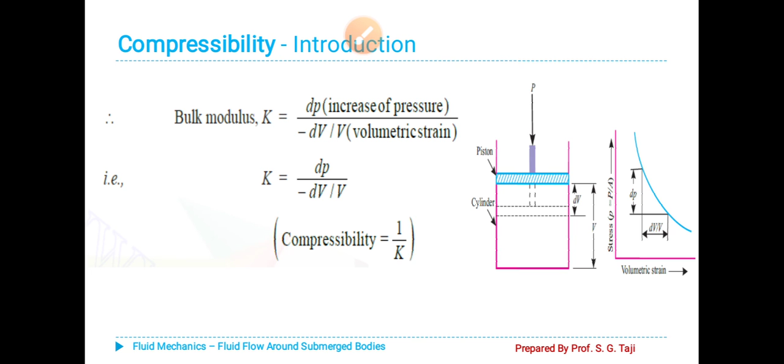Now we will see in detail about water hammer in pipes or hammer blow in pipes. As I had already pointed out in the last class, whenever you enter into the bathroom or kitchen, when you stop the valve suddenly, you might have heard some noise in the form of dug dug noise. That is because of the phenomenon of water hammer. Actually, here water is assumed as compressible, because of which the elastic forces of fluid, that is water, which is flowing through pipe, should also be taken into account. This phenomenon is known as water hammer.

Water hammer can be defined as: whenever the water is flowing through the pipeline, if the valve is suddenly closed, the kinetic energy or momentum will be changed into pressure energy. Because of this development of pressure in the pipeline due to sudden closure of the valve, positive and negative pressure waves are produced, and they will move to and fro in the pipeline, that means backward and forward, till they get damped due to friction of walls of the pipe.

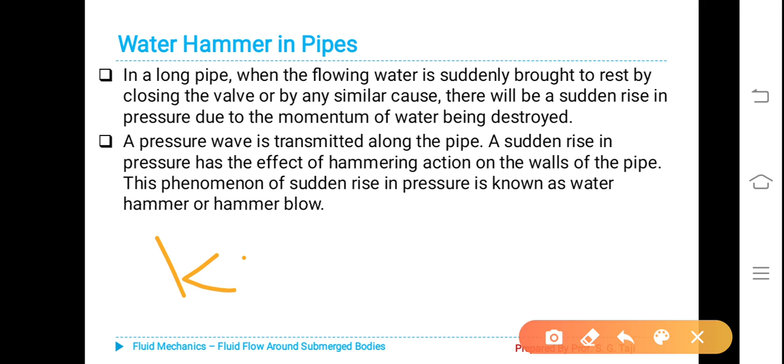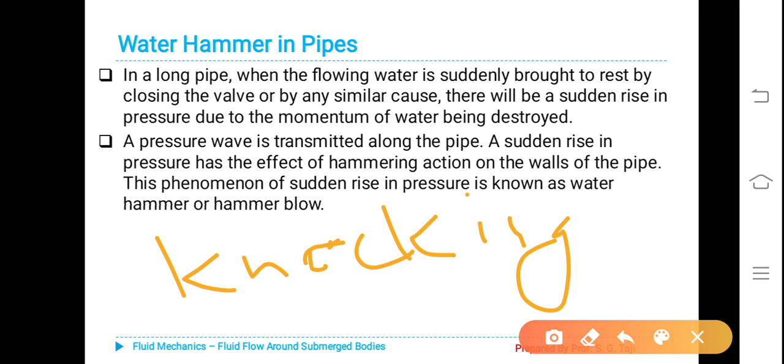During this movement of these waves, there will be a noise produced in the pipeline that is known as knocking. You must have experienced it in daily practice. In a long pipe, when the flowing water is suddenly brought to rest by closing the valve or by any similar cause, there will be a sudden rise in pressure due to the momentum of water being destroyed. That's how kinetic energy will be changed into pressure energy.

A pressure wave is transmitted along the pipe. A sudden rise in pressure has the effect of hammering action on the walls of the pipe. This phenomenon of sudden rise in pressure above or below the normal pressure due to the sudden closure of valve is known as water hammer or hammer blow.

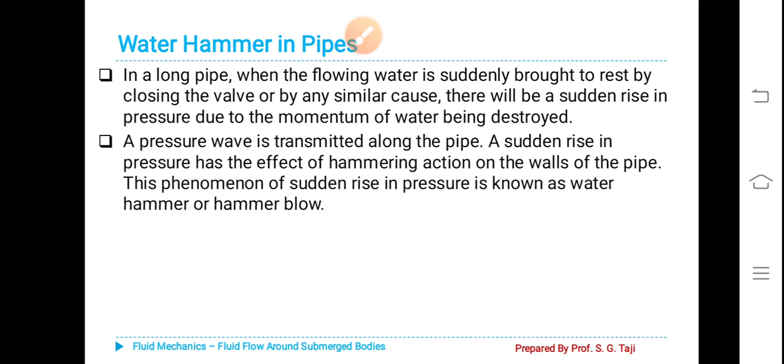Now, you should not be under confusion that since the name given is water hammer, this hammer blow is only with respect to water. That is not true. It could happen in case of any liquids, oils, other types of liquid apart from water, when they are flowing in the pipeline.

The pressure developed in the pipeline due to water hammer mainly depends on the speed at which the valve is closed, whether gradual or rapid. Gradual means slow, rapid means sudden. The velocity of flow of liquid in the pipe, the length of the pipe, and the elastic properties of the pipe material as well as that of the flowing fluid. Here we normally consider water only, not other liquids.

The rise in pressure in some cases may be so large that the pipe may even burst, and therefore it is essential to take into account this pressure rise in the design of pipes. Another effect of water hammer is, if the pressure reduces too low, then there will be a problem of cavitation in the pipe. That means the pressure should not be raised to a higher value nor to a too low value. In both cases, there will be damage to the pipe.

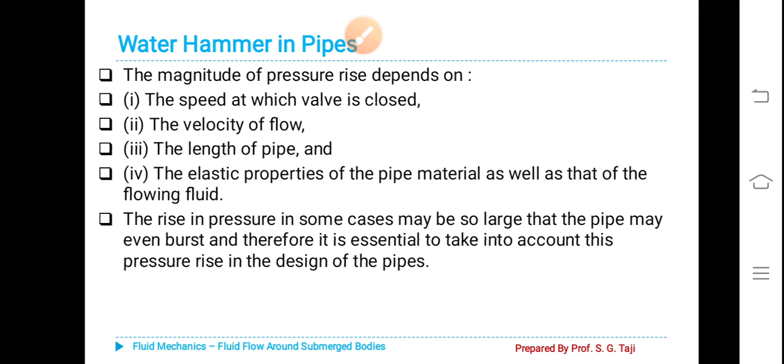Bursting of the pipe if pressure is increased too much. If the pressure comes below normal pressure to a lower extent, then there will be a cavitation problem. That's why superior quality steel material should be used for the pipeline, so that cavitation can be avoided. Cavitation will take place, but it can be avoided.

Further, for water hammer, we have to find the expression for rise in the pressure head. We consider two cases: gradual closure of the valve and sudden closure of the valve. Under sudden closure of the valve, we have to consider again two cases, that is, when the water is flowing through a rigid pipe, and another case when the water is flowing through an elastic pipe.

Consider a long pipeline carrying liquid and provided with a valve which is closed gradually. In the figure, let H be the head above the center line of the pipe, and let V be the velocity of water flowing through this pipe of length L. T is the time required to close the valve in seconds, and small p is the intensity of pressure wave produced. The mass of liquid contained in the pipe is rho A L, where rho is mass density of the fluid, that is water, A is area of pipe, L is length of pipe.

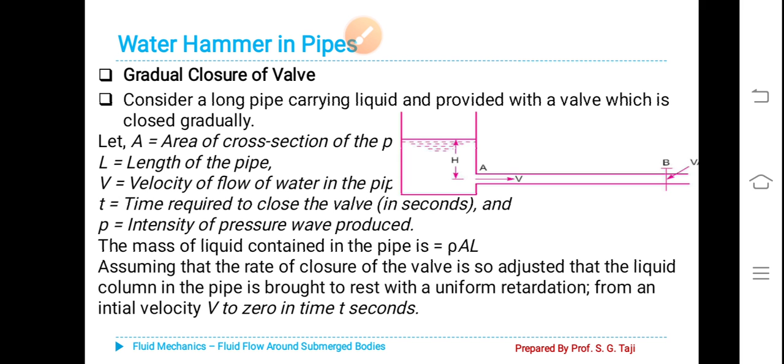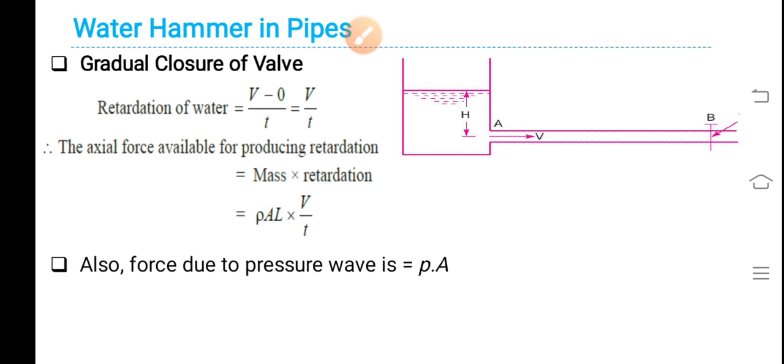Assuming that the rate of closure of the valve is so adjusted that the liquid column in the pipe is brought to rest with a uniform retardation from an initial velocity of V to 0 in time T seconds, then retardation of water is equal to V minus 0 divided by T, that is V by T. The axial force available for producing retardation is mass into retardation, rho A L multiplied by V by T. Also, force due to pressure wave is p into A, where p is the rise in pressure due to water hammer and A is the cross-sectional area of the pipe.

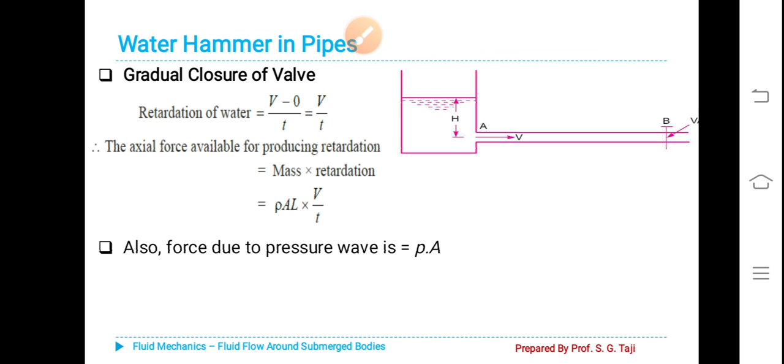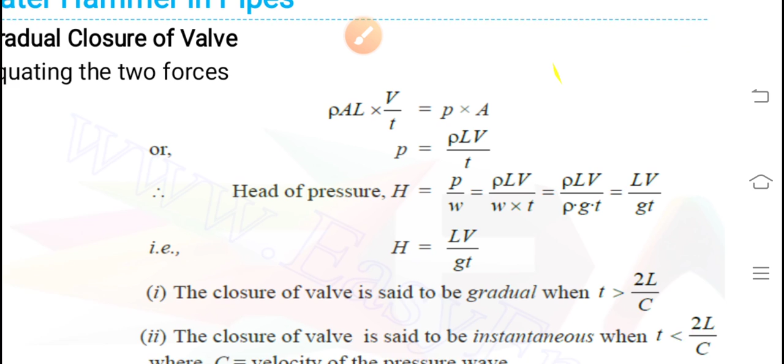Then we can equate these two forces. Rho A L V by T must be equal to p multiplied by A. Thereby we get p is equal to rho L V by T. Head of pressure H is equal to p by W, where W is specific weight of water. So rho L V divided by W into T; in many books gamma is used instead of W, both are one and the same. Rho L V by rho g T, rho gets cancelled, giving L V by g T.

Because here gamma is equal to rho g, we get this equation: H is equal to L V by g T. The closure of valve is said to be gradual when T is greater than 2L by C. We will come across this aspect a little bit later. The closure of valve is said to be instantaneous when T is less than 2L by C. This will come at the end of the water hammer class.